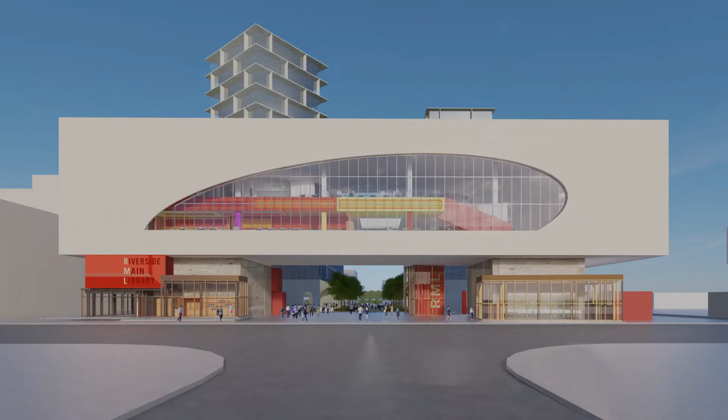Thousands of people worked together to make this concept a physical building. Framers, concrete mixers, roofers, fireproofers, delivery drivers, each working in tandem to finish on time and under budget.

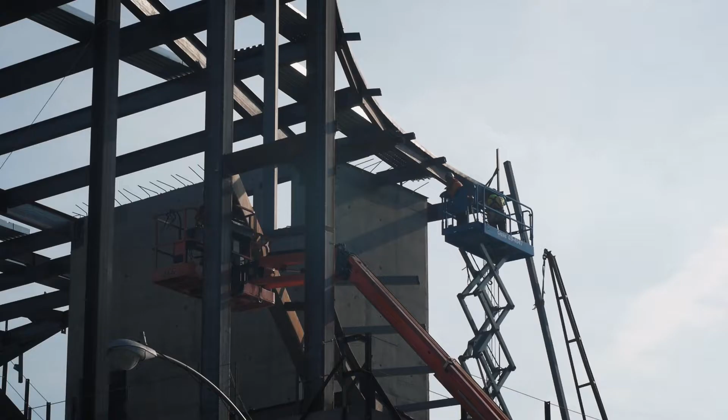Projects like this are immensely challenging in the best circumstances. 2020 was not that. You're talking about a city telling businesses they have to close. I'd be shocked if that's ever happened in the history of the city.

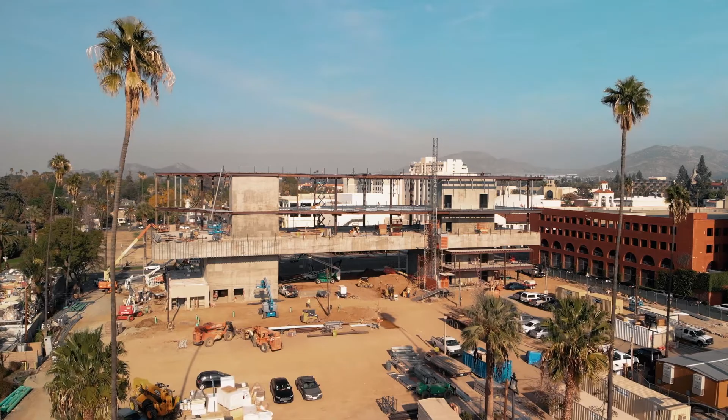Despite the pandemic, library construction is still on track. So how do you take the idea of a building and make it real?

Architects don't build buildings, we make drawings. So we have to communicate how to build this three-dimensional thing. It's a ton of coordination. That's Kevin Garrity, Johnson Favaro's team lead for construction administration of the Riverside Library.

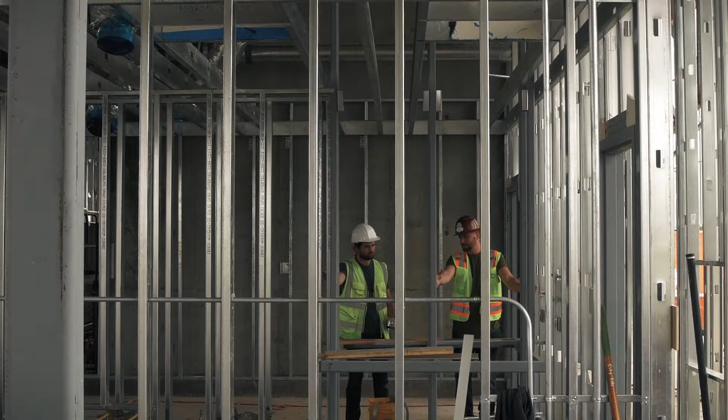His job is to be the architect team's eyes in the field, ensuring that the dozens of subcontractors on the project place steel, pour concrete, and lace utilities throughout the building in accordance with the design documents.

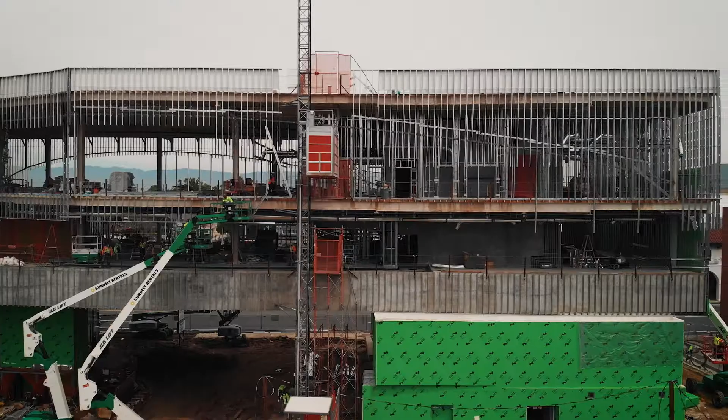We always have an idea, but we really don't know anything about it till we begin drawing it. Through drawing, we learn about our realistic parameters.

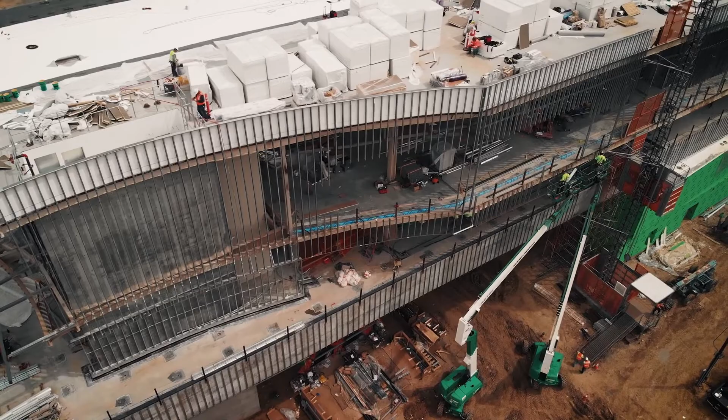Libraries are heavy. The dead load of books is a significant factor in the structural design. You have to work with building systems like mechanical, HVAC, ducting, and you have to work with lighting. A lot of things go on in a ceiling that just remain hidden from view.

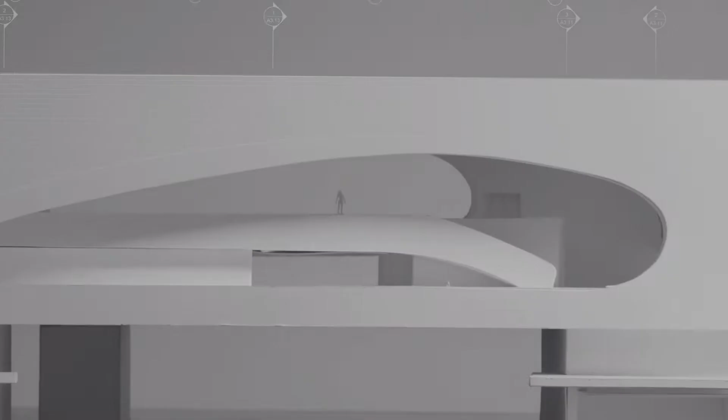Details have to be drawn, because if you don't draw the details, then the concept won't get built. There are hundreds of people involved in the building of the building, and it all has to be communicated through the drawings. And that just requires a lot of foresight.

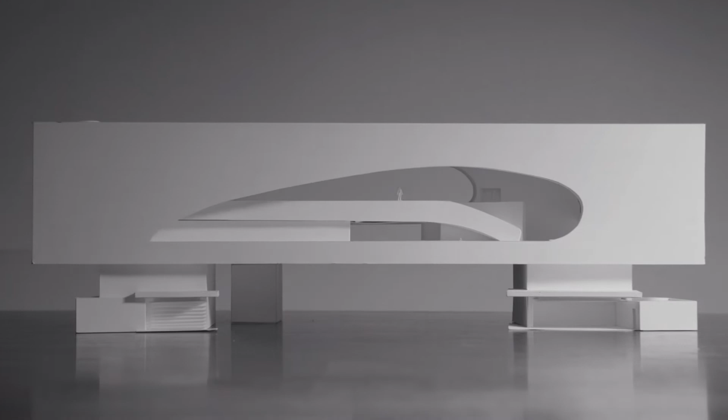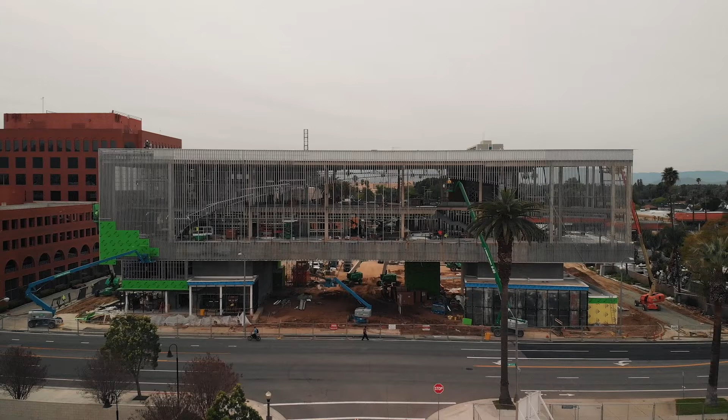For public projects like this, the architect has no say in who actually builds the structure. Contractors submit anonymous bids based on an open call, and the city is required to accept the lowest bid.

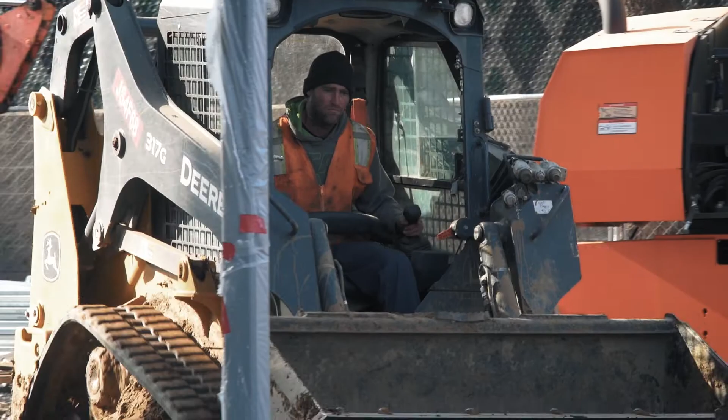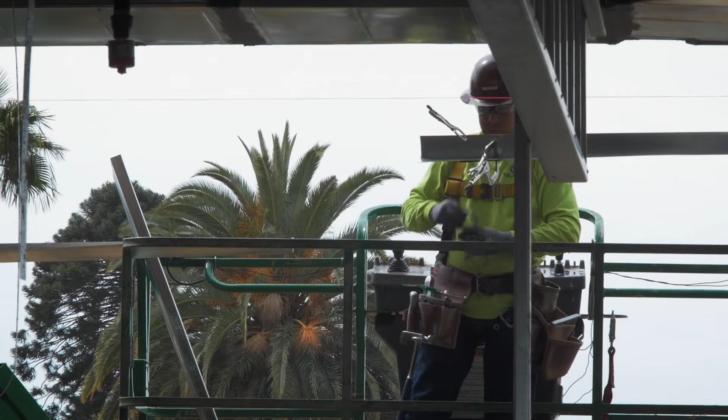From that moment that that's established, every contractor has to do everything in their power to stay on schedule. Every minute that they rent a trailer, every moment or hour or week that they employ a crew is money out of that value that they gave to the project at the time of that competitive bid. So they're under an enormous amount of pressure.

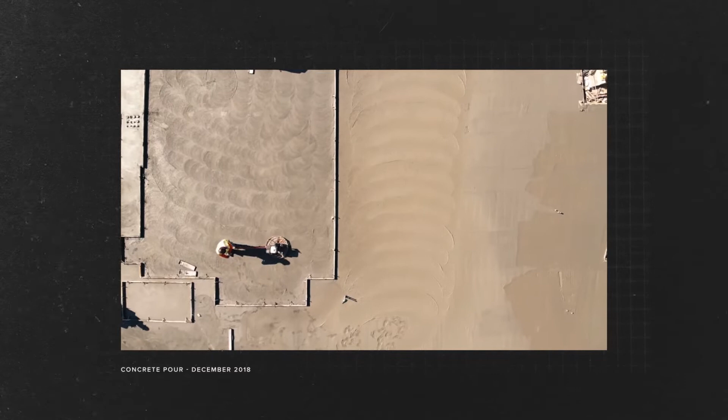And it's a risky endeavor for them, and so we work hard to help the builder as much as possible. For the first several months, construction focused on the building's massive foundation and concrete cores, a process which culminated in an assembly line of 40 trucks, pouring load after load of concrete into formwork filled with reinforcing steel.

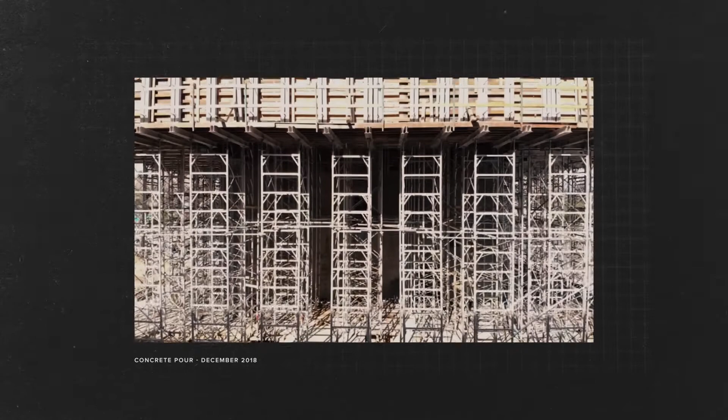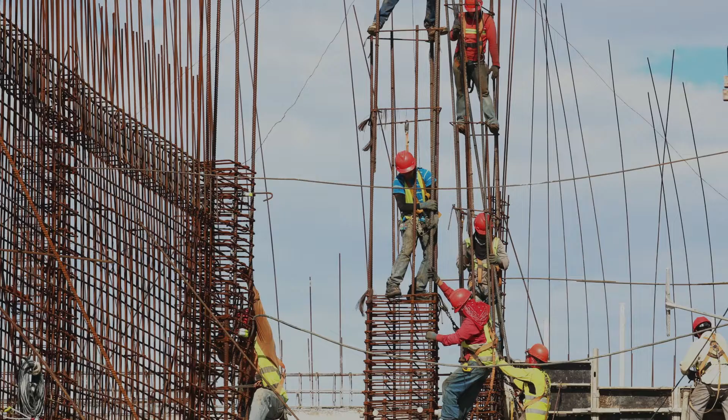We were lucky to have that because once the pandemic started, materials started to get scarce. Concrete, in particular, has entered into a shortage right now because concrete plants are operating at 8 hours a day when usually they operate at 24 hours a day.

If you didn't hit those moments when the pour was scheduled, if you didn't hit that right at the moment, you'd lose your queue in line and you might be 6 weeks delayed.

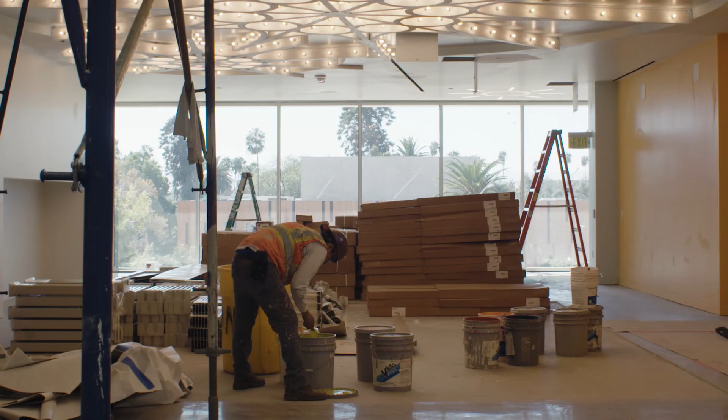As an essential service, construction has continued during the pandemic with modified rules for workplace safety. But COVID's effects on the supply chain were harder to navigate.

It's all about just foresight and planning. It's really logistics, and that's what's in the news with every aspect of our life. You know, how we get our groceries, how we get any materials.

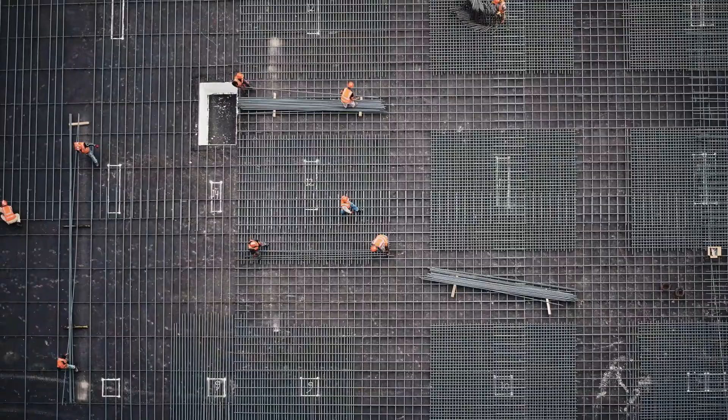It's just magnified by hundreds when you get to a construction site because it's all about the procurement and delivery and installation of thousands of materials.

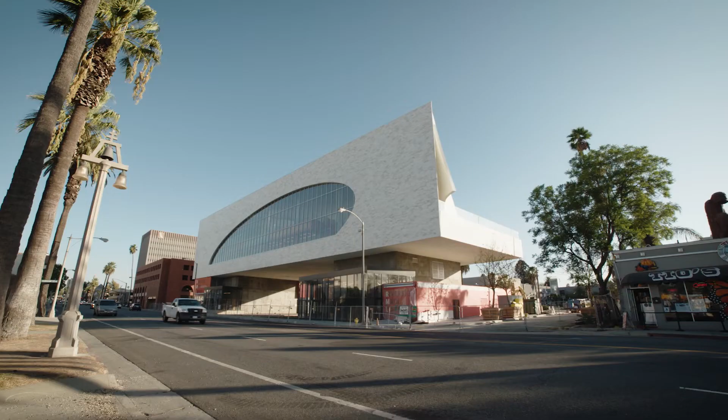This project has bulldozed through pretty much any sort of issue. The contractors on site joke around, how much more can this project go through?

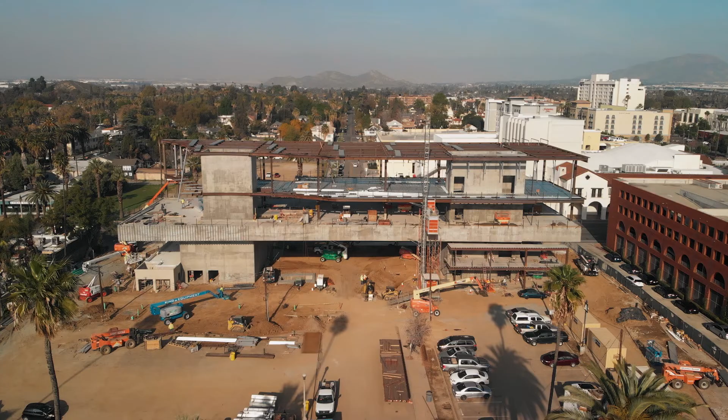We've developed a really good relationship, which is important. This relationship between contractor and architect is the key to transforming an idea into a physical building.

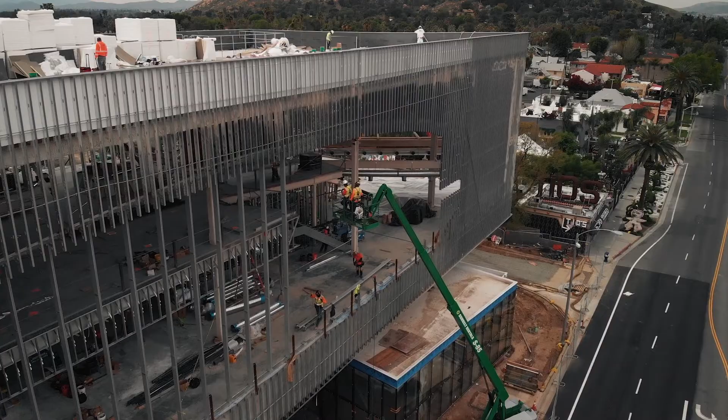The original library drawings were a promise to the community of Riverside, and construction is the challenging but rewarding process of fulfilling that promise. Work began in March of 2019. After 21 months on the job, we're finally getting close.